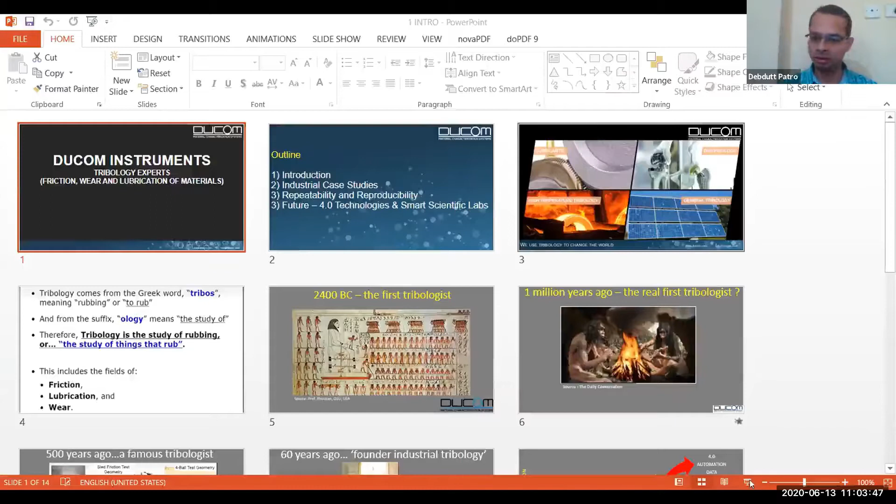So Ducom Instruments, our company, we have been around for 40 years in India, and we call ourselves the tribology characterization experts. Tribology here being the study of friction, wear, and lubrication of materials.

Outline of this 1 hour or slightly more interaction session: we'll start with a brief introduction, then quickly jump to several industrial case studies where we use material characterization methods to understand the performance of different materials. We will also highlight the importance of repeatability and reproducibility of test data, scientific data, and finally conclude with some future looking statements and ideas we have on how we can convert scientific labs from what we knew earlier to make them more future ready.

How can we get a lot of 4.0 technologies inside our day-to-day working culture when we do science, and use them to make our labs more productive.

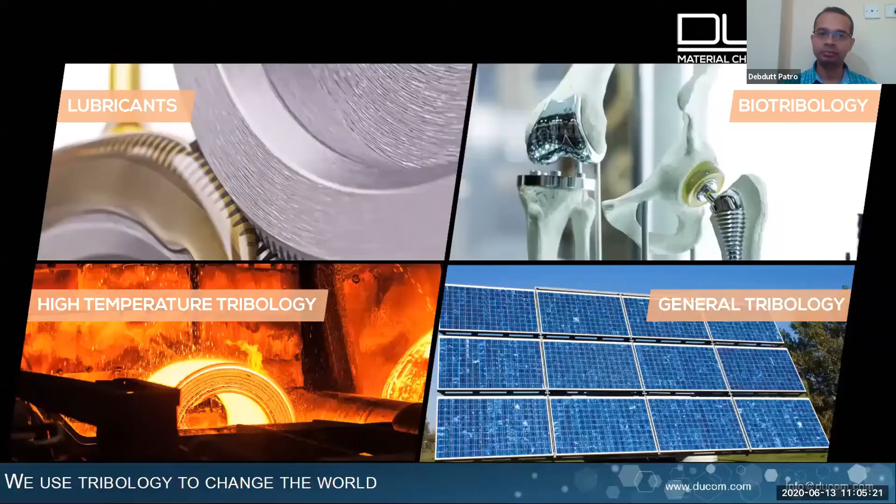Tribology, being the study of friction, wear, and lubrication, is very diverse. It touches upon a wide variety of applications and industry segments. On the top left, you can see it's a gear, a very common mechanical element, where you use lubricants. On the top right, you see a more human interface, where you start looking at implants and things which go inside the human body, and these two have to last for quite a long time.

That area is called biotribology. On the bottom left, you would see a steel rolling mill, and there too there's a lot of high temperature materials and interactions of materials during the rolling process. So this would be another extreme of temperatures exceeding 800 degrees, requiring evaluation of materials at high temperatures.

Finally, on the bottom right, you see something on the solar panel. Again, solar panels are supposed to be efficient, using photovoltaics to generate electricity. But over a period of their life cycle, 20-25 years, a lot of solar panels get eroded, the surface gets degraded, so the efficiency comes down. The wear and degradation of materials because of exposure to environments, whether in the solar panel, in industry, or even inside the human body, eventually leads to materials degradation and efficiency loss, and in the worst case it could also risk safety.

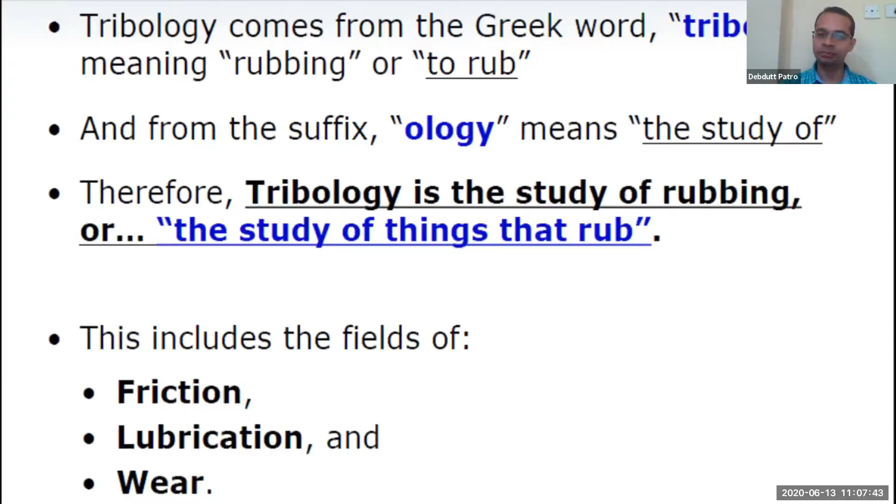If you go back into history and look at where this study of tribology started, we were using its principles much before the scientific understanding. This is a painting from 2400 BC showing people dragging huge blocks of rock to build pyramids in Egypt, in the desert, where dragging things is fairly difficult. So people started using hot oil or some kind of lubricant to reduce friction and make it easier to pull.

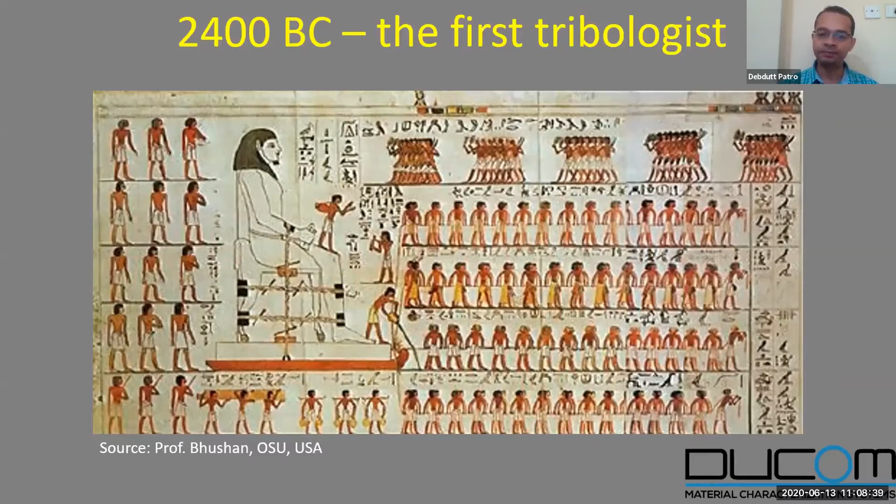At that point in time, they did not know about friction, but it was mostly experience. Of course, before this, the very first event which happened a million years ago was fire. Taking two pieces of rock and rubbing them generated heat because of friction, and that lit dry pieces of wood and leaves, which enabled us to control and manage fire and evolve from being cavemen to a more civilized society.

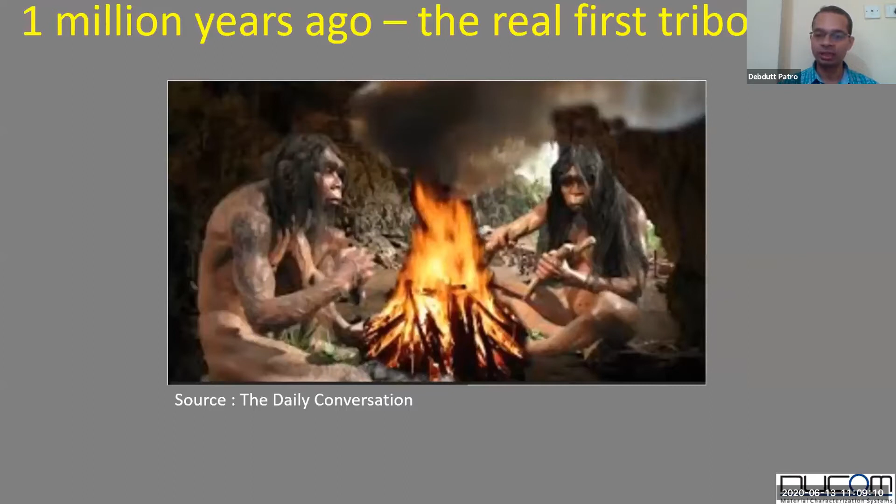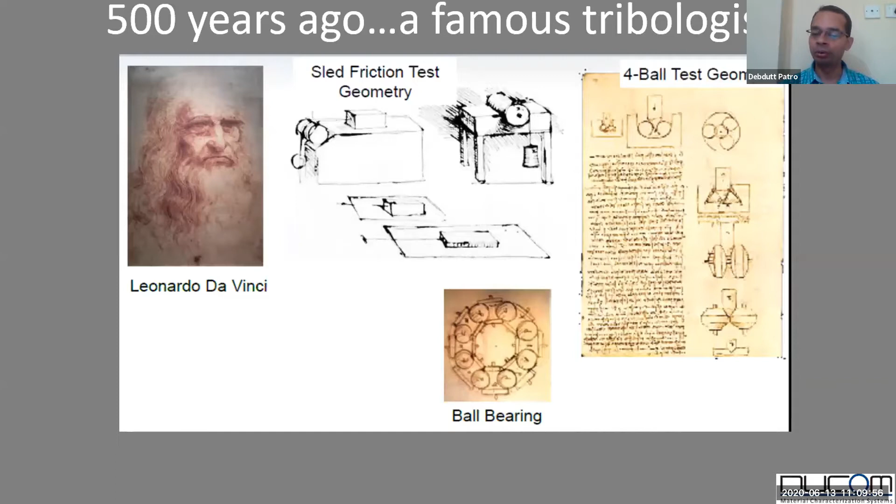With a lot of experience over several thousands of years, it was only 500 years ago that Da Vinci, who among other things was a very great painter, was also a very good engineer. He developed scientific principles and sketches, and this is from his own work showing how you can measure friction between two surfaces using simple geometries. More importantly, he also showed us how to design what we see here as ball bearings, which can convert sliding friction into rolling friction, controlling and designing this for more industrial machine technology.

It was about 60 years ago that late Dr. Peter Jost actually founded what we know as industrial tribology. He was asked by the UK government to see how we could reduce friction or energy losses in industrial systems. He chaired a committee and realized, and submitted a report based on his findings, that if we are able to control the amount of friction and reduce the amount of wear, we could save a lot of energy, give us more time on our resources, and also lead to lower emissions. That laid the foundation for modern tribology as we know it now.

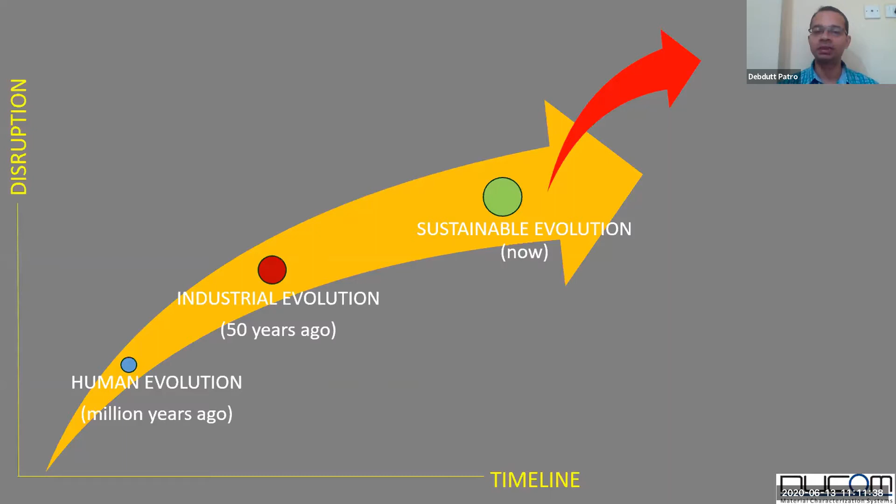So if we summarize all that was covered, we're looking at some kind of disruption in our understanding of this subject on the y-axis, with the timeline on the x-axis. Starting with human evolution from cavemen with control of fire, then industrial evolution with Dr. Peter Jost, and now we are in the sustainable evolution period where we want to grow in a more sustainable fashion. The next question is where we go from here, and toward the end of this talk we'll cover how we can use data, sensors, and Industry 4.0 technologies to reimagine how science and tribology should be.

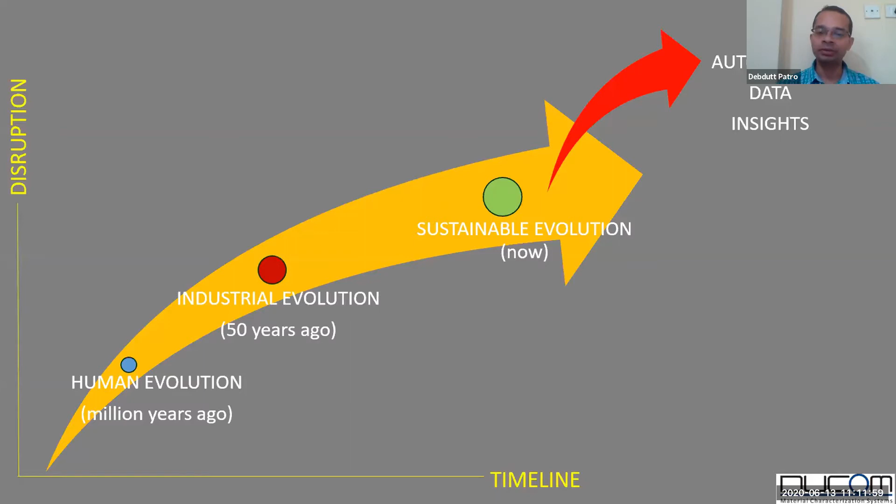At Ducom, we actually embody this spirit, and we use tribology to build solutions, build products, and offer services which we believe will change the world.

Quick background on our company: we are based in Bangalore, India, and in the last 10 to 15 years we have established offices in the US, in New York, in Europe we have an office in the Netherlands, and last year an office was opened in Malaysia, inside the University of Malaya.

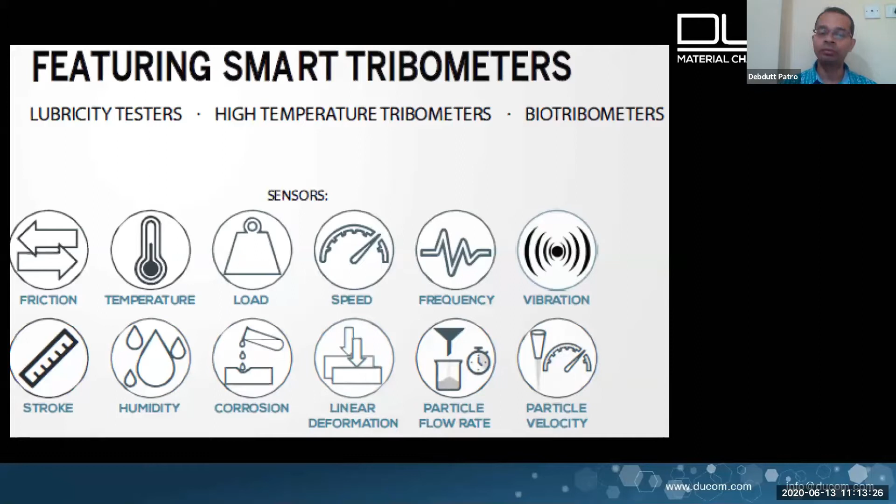We build a lot of tribometers. Given that tribology is a very diverse topic, covering high temperature, lubricants, and even things happening inside the human body, we build a wide range of tribometers, all with a lot of sensors to capture data during the test. These sensors are connected to a digital platform which makes them smart, much like your smartphone or a smart fridge, helping you monitor remotely what's happening on the tribometer.

So these are a wide variety of tribometers. I don't want to cover them now, as that's not the intent of this talk. You can get a lot more information on our website about our tribometers and technology, as well as reach out to us at the email address above.

So that was a quick introduction. I will move on to the next section.

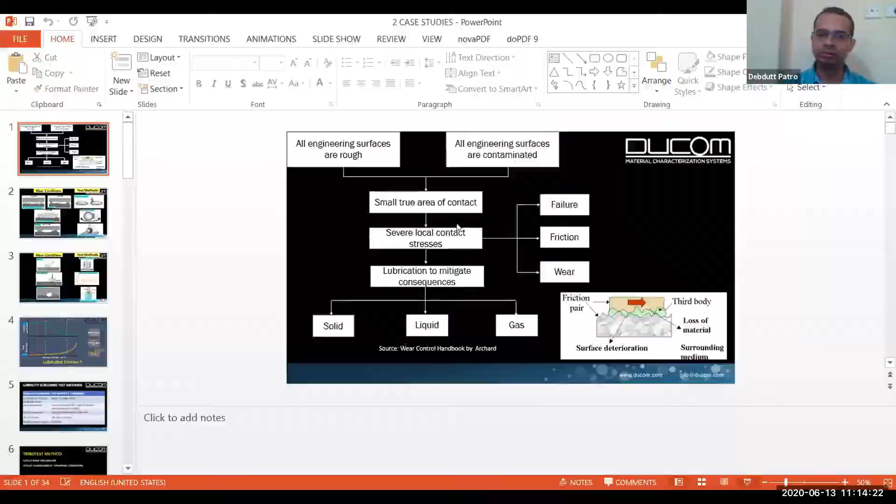This will be a slightly long segment, and we'll cover and refresh some of the basic principles of tribology, friction and wear. Then using those principles, we'll see a few case studies where we can use that understanding to set up a problem, and also how we use material characterization techniques to solve and come to some scientific insights on these problems.

So this is a simple chart from a wear control handbook by Archard. It's very powerful in a sense that it captures pretty much all the elements of tribology in one slide.

So if we focus on the left side and start from the top, we look at interacting surfaces or surfaces which rub against each other. The statement goes: all engineering surfaces are rough. Even though we get super fine surfaces, they still are rough, and they are contaminated. There are no surfaces which are truly uncontaminated or clean; there will be some extent of contamination.

When these rough surfaces, which have contamination, rub against each other, they rub against asperities which are there on the surface. When these small asperities contact each other, you get local stresses which are fairly high. When these local stresses exceed some of the material properties, which are very surface specific, you could get failure, which could be fatigue, but you could also have friction being generated when these asperities rub against each other. And when you exceed certain strength parameters of the material, you could have those asperities removed and get wear.

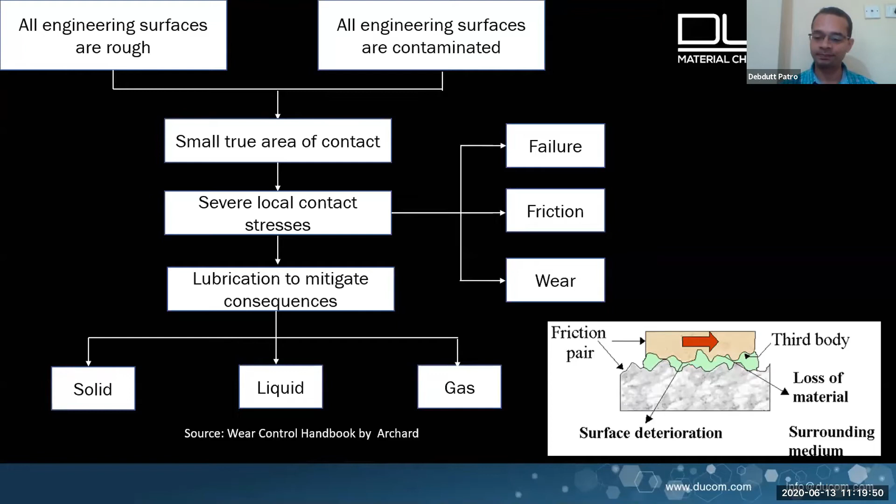Now we'll quickly look at when these asperities are contacting against each other. There are two scenarios. One is where there is solid to solid contact, then you get wear, dry wear. Then we will have liquid, which is put as a lubricant, and there you will have liquid or liquid lubricated wear.

So whether there is a third body like sand or there is no third body, the way one would set up and look at a test technique is called a pin on disc tester, ball on disc, or pin on disc. This is one of the most common instrument techniques or test methods for looking at friction and wear of materials. Pretty much 90% of all problems can be solved or understanding developed at the lab level by looking at a pin on disc tester.

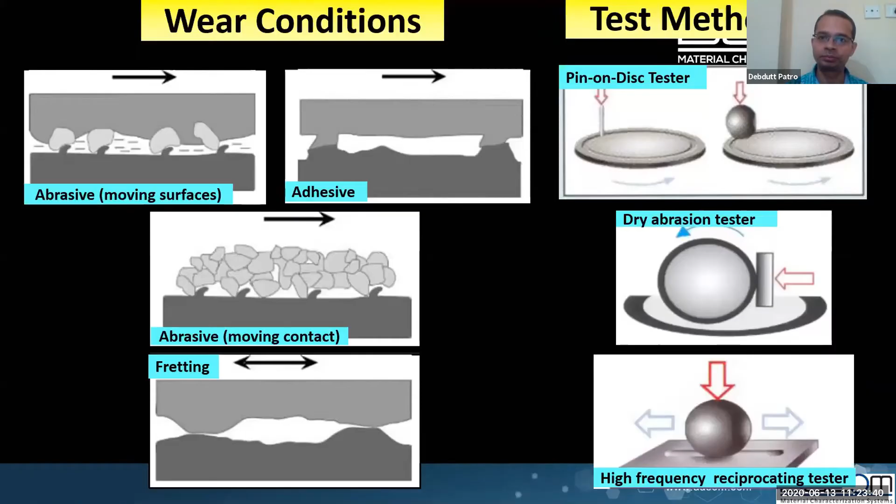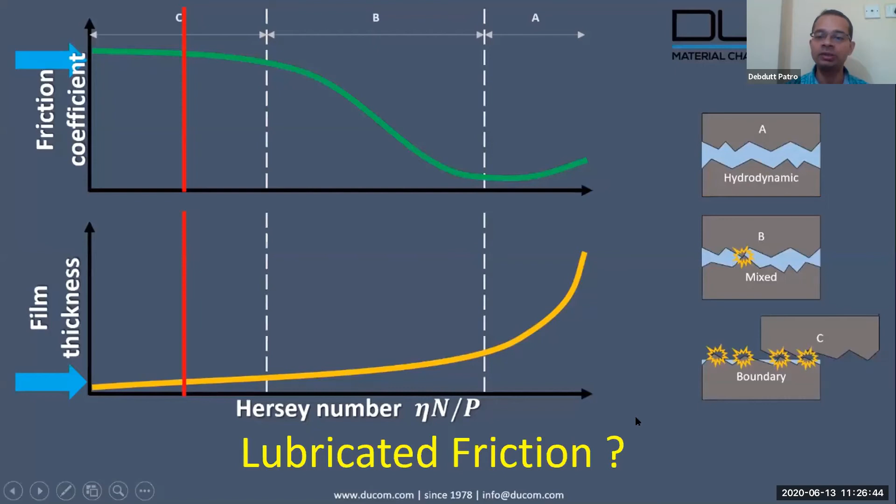So quickly to summarize that, we covered the tribology, the basic mechanisms, whether it is dry wear or lubricated wear. Even in dry wear there are several categories, and in lubricated wear there are several regimes of lubrication and friction. Understanding all these regimes and mechanisms is very important, because when we conduct material tests and lubricant tests in the lab, we have more knowledge on what these experiments are and how to interpret the results.

The second point which is important is that there are certain characteristic operating conditions which we want to capture. For example, stainless steel is used both in steel rolling mills and inside the human body. If I want to understand friction and wear of stainless steel inside the human body versus in the steel rolling mill, I cannot use the same test method, because of the operating conditions these materials would see. So we have to add another element of certain characteristic test conditions.

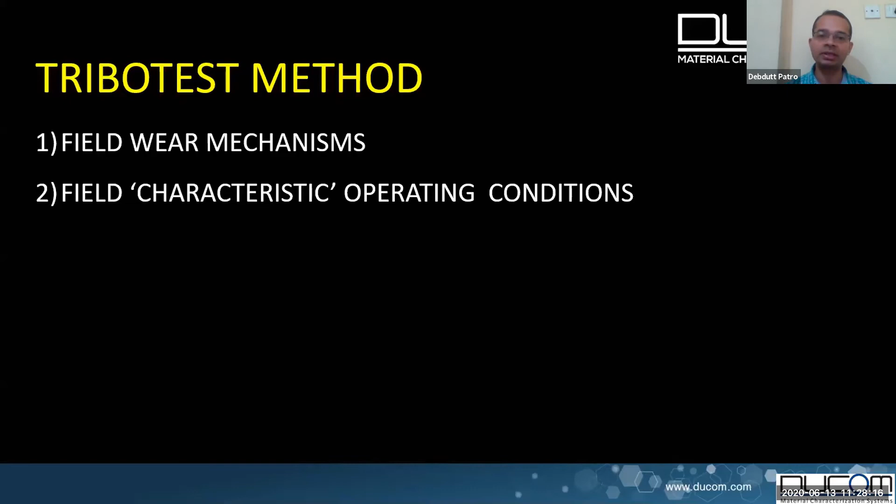Now summarizing all that, I will highlight 3 case studies, primarily addressing some of the broad challenges which we face. One is climate change and emissions, we want to reduce carbon dioxide emissions, and there are certain technologies used for encountering that. We also want to have a healthy lifestyle, people are living longer and want to live healthier. And finally there's energy efficiency, energy generation and usage. So there will be 3 case studies presented covering all these aspects, and also looking at some of the fundamental friction and wear mechanisms we understood in the previous slides.

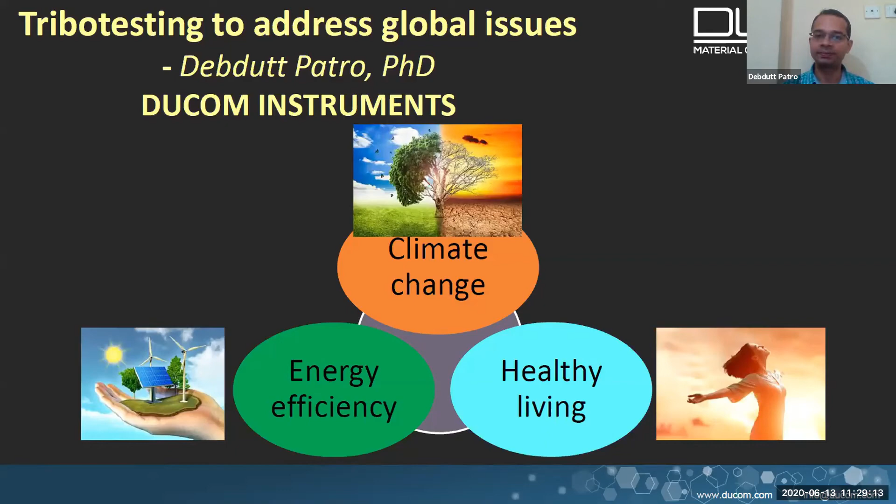Climate change: transportation is a big industry, and 25 to 30% of greenhouse emissions comes from transportation. 10 to 15% comes from mining. So there is a lot of interest in reducing the emissions of greenhouse gas, and most of that has to do with reducing friction. If we reduce friction, we get more of our energy converted into motion, and we don't waste it otherwise.

There are estimates which say that a 30% reduction in friction would give you 1,500 million tons less carbon dioxide. To put that in perspective, every car we use for personal use emits about 5 tons of carbon dioxide per year. So if we reduce friction by 30%, we can take almost 300 million cars off the road, or an equivalent emission reduction. These are huge numbers, and that is a very big motivation to reduce friction in transportation systems.

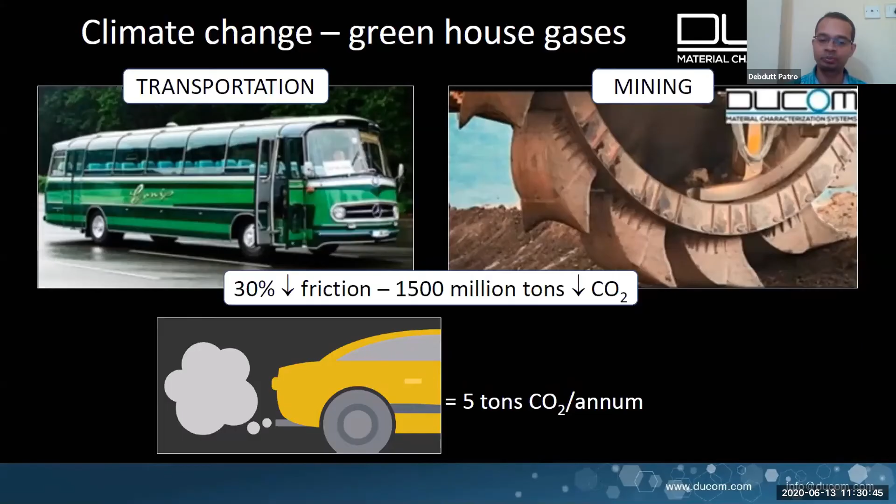If you look at a transportation system like an internal combustion engine, which we are still using, we are transitioning to electric and hybrid electric vehicles, but we still have at least the next 10 or 20 years before the complete transition happens. For the time being, there is a lot of focus and drive on improving efficiency and reducing emissions even in internal combustion engines.

One of the biggest areas where you get a lot of friction loss is the piston ring cylinder liner. If you see here, because we add engine oil, it lubricates. So we will use this as a case study for lubricated wear.

When it operates in a reciprocatory motion, it goes from top dead center to bottom dead center during the entire combustion cycle. In terms of the lubrication regime, it goes from boundary to mixed and also hydrodynamic. So if we have to set up an experiment to study whether a lubricant is good or can reduce friction in an internal combustion engine piston ring and cylinder liner, it has to explore all these regimes.

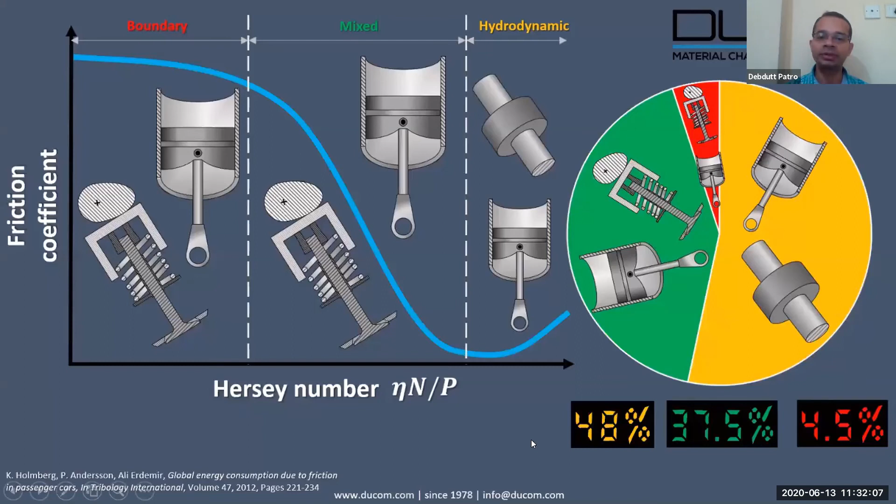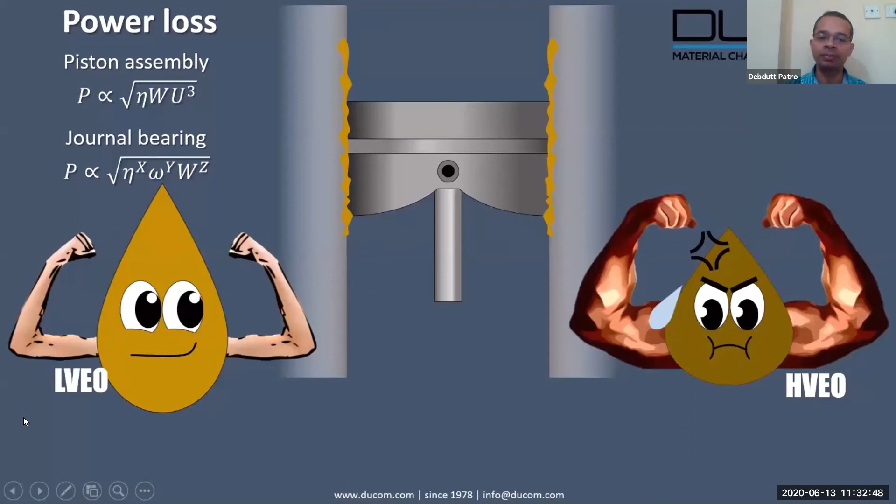Now we have picked up two candidates for evaluation here. One on the left is called low viscosity engine oil, where the viscosity is lower, and on the right you have high viscosity engine oil. An example of high viscosity engine oil could be 20W50 oil, which we put in our vehicles, while low viscosity engine oil is 10W30. There are mathematical expressions which say that power loss is proportional to viscosity, so lowering the viscosity helps reduce power loss and thereby improve efficiency.

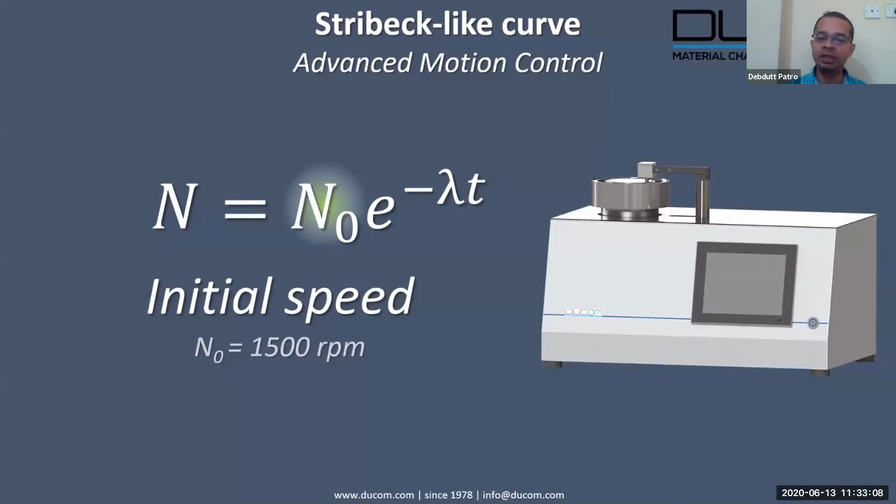Again, we go back to a pin on disc test, but now because we have to cover different regimes of lubrication, we set up a test where the speed, and especially the speed changes. On this plot, the white curve is the speed, and the green is the friction measured between the two surfaces in the presence of a lubricant. The speed during this test, which lasts for 30 minutes, starts off at 1500 RPM between the parts and decays to around 100 RPM. This is intentionally set up so that we can see the entire regime of lubrication.

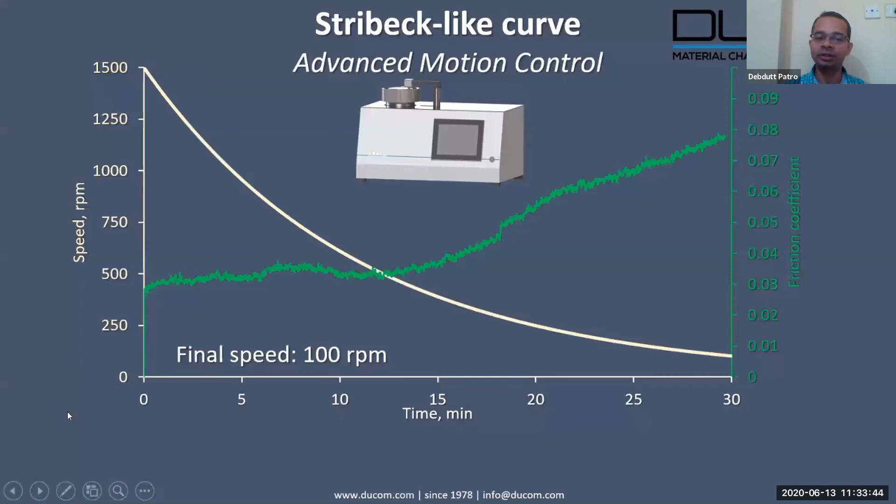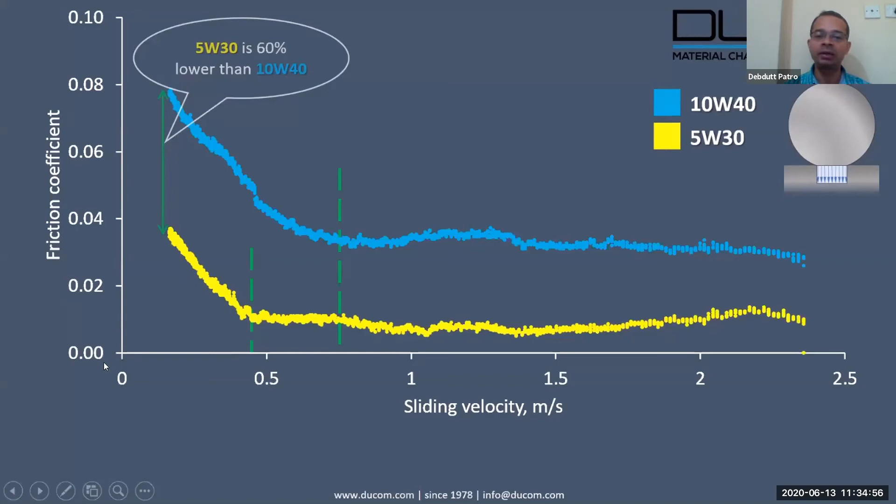This is the test data from a tribometer with two different oils. The blue one is the high viscosity 10W40, and the yellow one is the low viscosity engine oil 5W30. The Stribeck curve tells us that the friction coefficient is not a single value, but depends on your operating condition. You can see data from the machine suggesting a typical Stribeck curve. More importantly, the yellow curve is 60% lower than the blue curve, so the difference in friction coefficient between these two oils is close to 50-60%, about 0.08 and 0.04 from this test data. This immediately gives an indication that going to lower viscosity engine oils is beneficial, not only in one regime of operation, but the gap between these two curves is fairly consistent across the entire operating regime on the x-axis.

These studies have also been translated to the field. There are many reports from Europe where these engine oils have been changed in school buses and public transport systems, and tests run. These fleet tests give around 0.5% fuel saving. When we run laboratory tests, we get around 0.37-0.4% fuel saving. This gives a lot of confidence and clarity that simple tests in the lab, if set up and done correctly, can also give a lot of insight into how improvements can be made in the field.

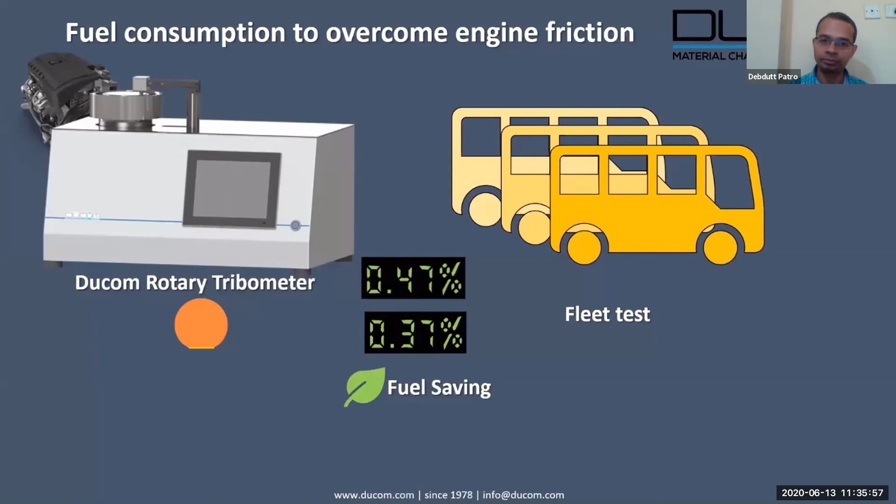So the first was an example of lubricated wear. Now we will go to another important thing, especially in the context of India. Since we are still heavily reliant on coal as a major source of power generation, and India is a signatory to COP, the Paris Climate Change Conference Treaty, we want to reduce emissions from coal and improve the efficiency of our thermal power plants.

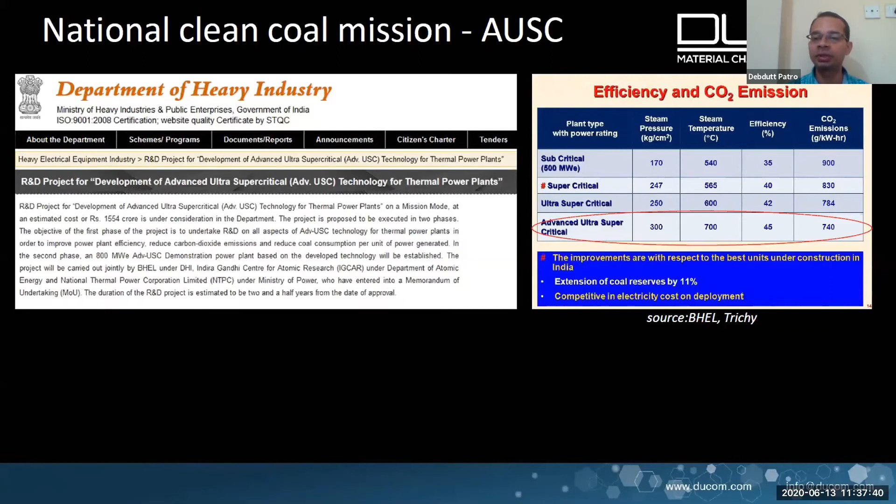Improving efficiency and reducing carbon dioxide emissions also means operating these power plants and infrastructure at higher temperatures. One form of failure seen under these conditions occurs in a typical gas turbine where the combustion process takes place. You have a combustor and a liner, and these parts are mated against each other. Because of the combustion process, there is a lot of vibration, and they rub against each other, causing damage. When critical tolerances are exceeded, the combustion efficiency comes down, so excessive wear can reduce combustion efficiency. That is the problem - how do we address it?

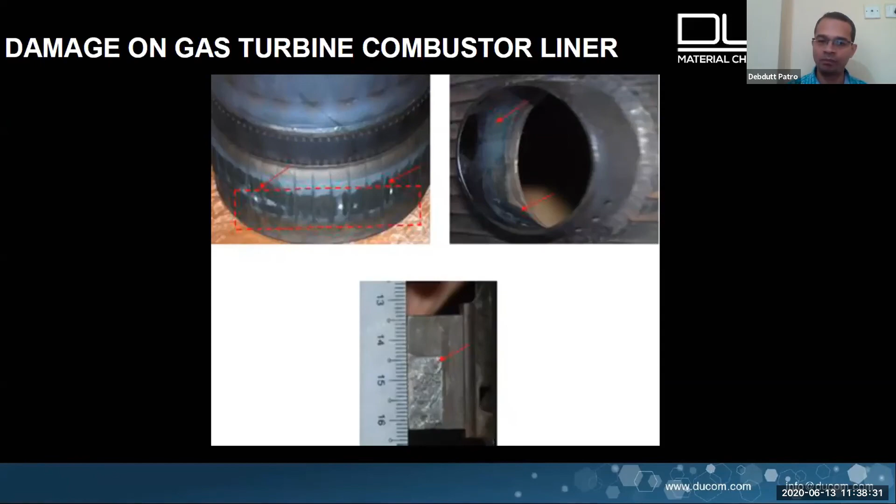We have to now simulate conditions of very high temperatures with surfaces rubbing against each other, so we rely on setting up an experiment. This is a video.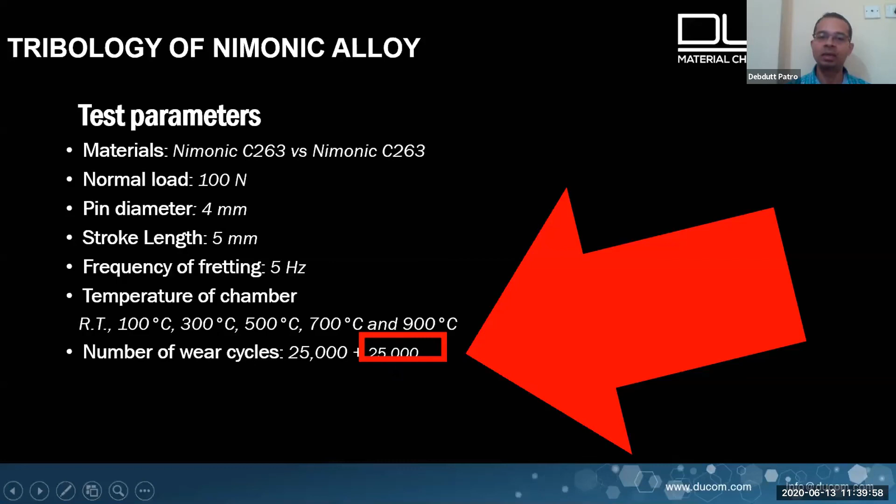This is the test data we got at the end of the experiment. On the y-axis you see friction between the rubbing surfaces, and on the x-axis is the timeline or number of cycles, going up to 25,000. Starting from the top, the friction coefficients are 0.5 to 0.6 at temperatures up to 300 degrees. As soon as you increase temperatures beyond 300, up to 500, 700, and 900, the coefficient of friction drops dramatically, from 0.5-0.6 down to 0.1. So these surfaces at high temperatures are less resistant to rubbing against each other.

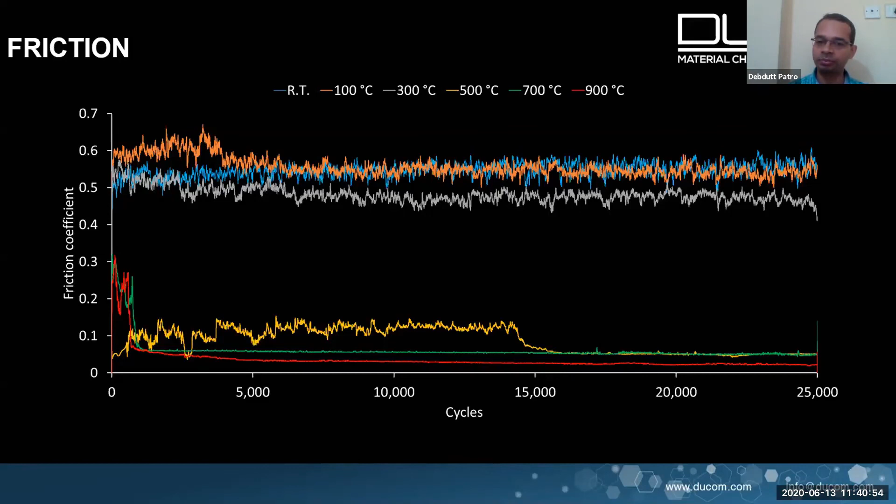We also measured the wear, or how much material was removed from these surfaces as a function of temperature. The y-axis shows volume loss in millimeter cubed as a function of temperature. Again the same trend: at ambient, on the extreme left, there is very high wear, and when you go to higher temperatures exceeding 700, you get very low wear. So surprisingly, when you take some of these advanced materials and rub them against each other, as temperature increases, the friction and wear drop down dramatically.

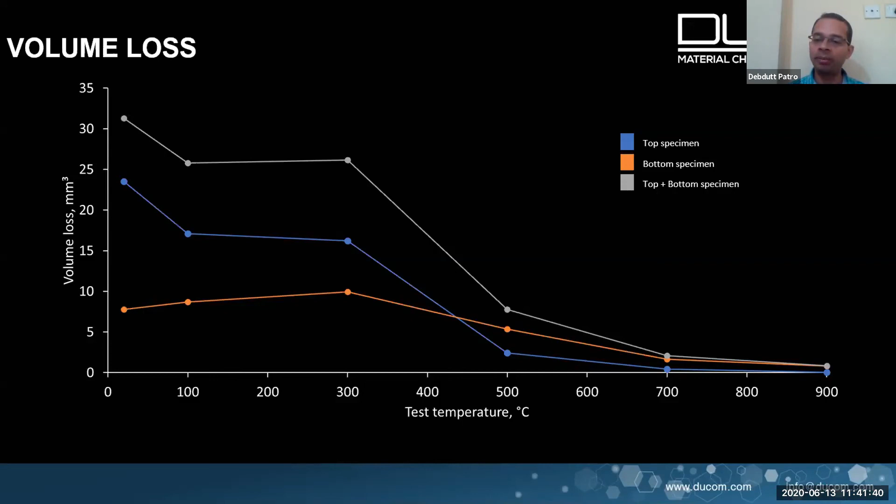So these are some of the post-test observations. One can also do a lot of characterization to understand material behavior. You start observing the materials and see very shiny surfaces, which are typical of metallic nature. As you go up to 900, the surfaces have become dark after rubbing. So there is some kind of material on the surface, and this is the third body which forms.

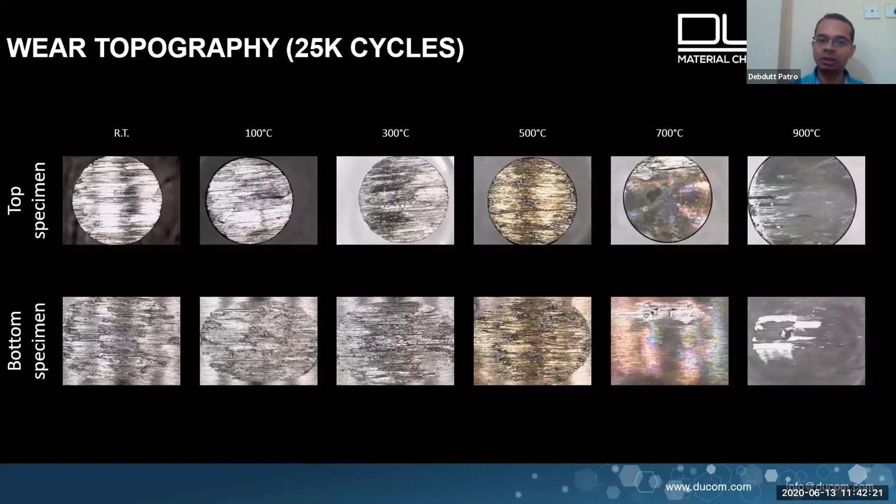Here are some EDX results showing the composition of the material on the top surface. The red bars here at 900 are for oxygen, and the levels of oxygen are fairly high when you go to high temperatures. So the material starts oxidizing, and when it oxidizes, the initial metal-to-metal contact is prevented. A third body comes into the contacting surface, and that reduces friction and wear.

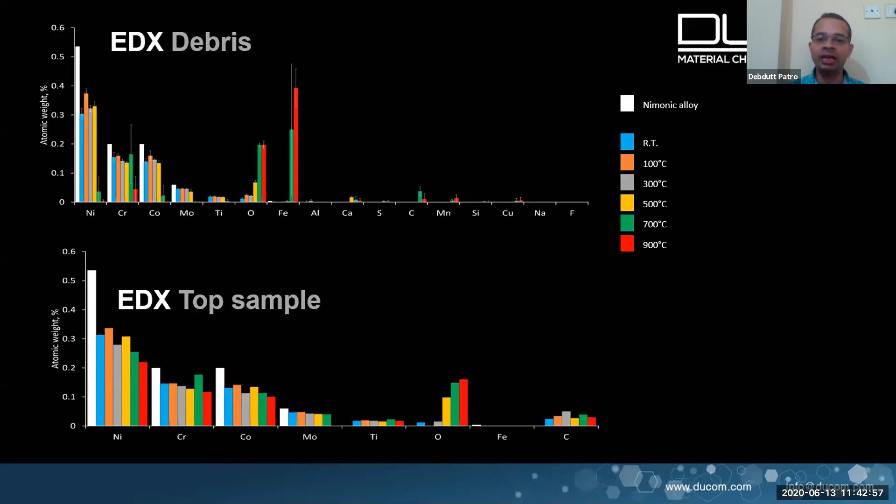Quick summary of this test: at high temperatures, some of these Nimonic alloys proposed for use show low friction and low wear, because of the in-situ formation of these tribo layers, third bodies, or glazes. These oxides are highly beneficial in gas turbine components, and they also help us discover new materials and identify new coatings which we can apply to reduce friction and wear even further, all from setting up a simple experiment in the lab.

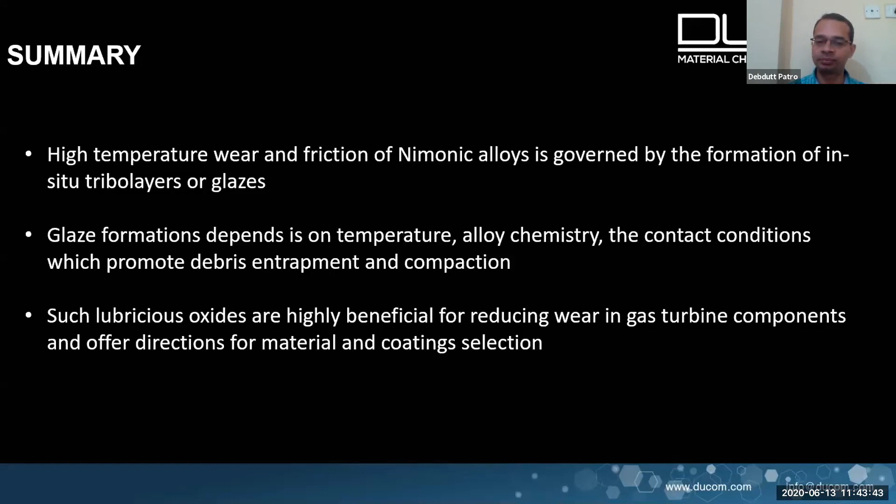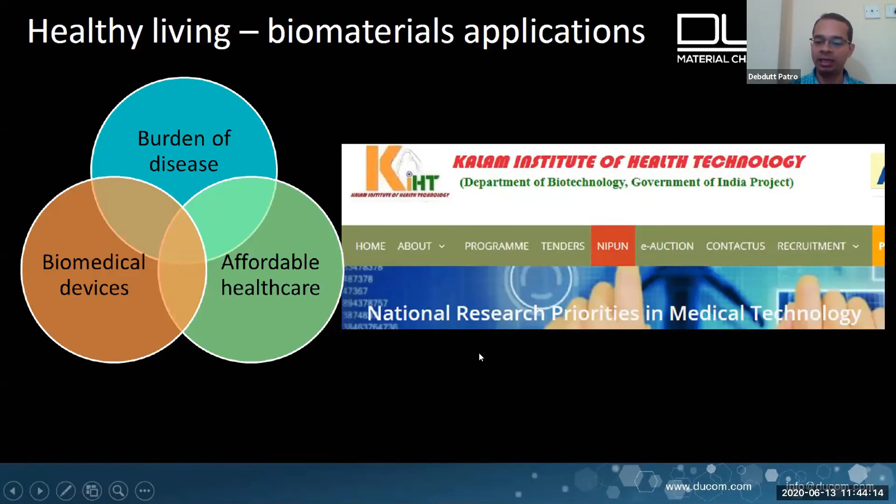Coming to the last case study here, on biomedical devices. The Kalam Institute of Health Technology is the coordinating center for a lot of research areas in medical technology, and this is from their website. They have national research priorities in medical technology, and some of the domains or technology areas connected with tribology, or friction and wear.

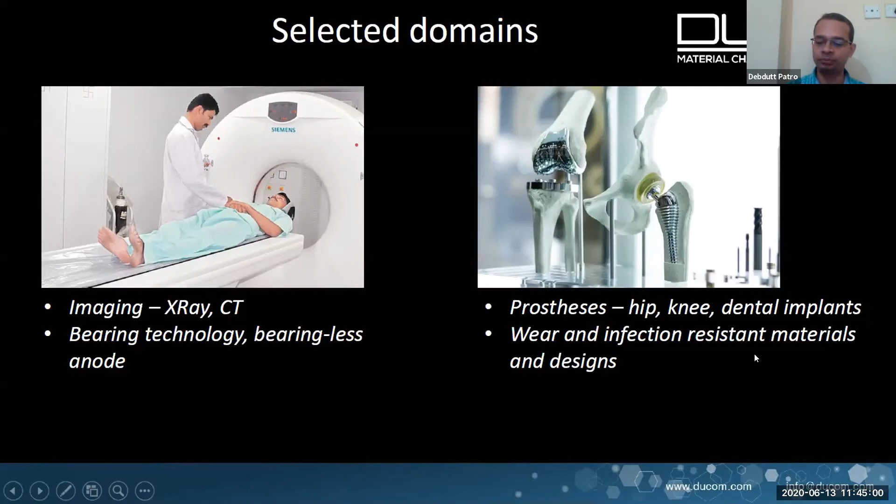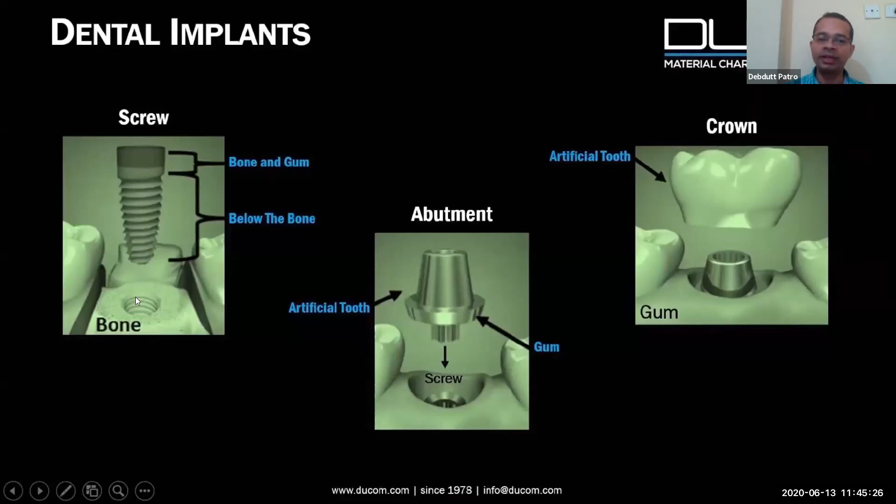In that context, can we identify these materials? And if we identify them, can we set up a test in the lab to know if these materials will perform better when introduced into implants? This case study is on dental implants. A dental implant typically has...